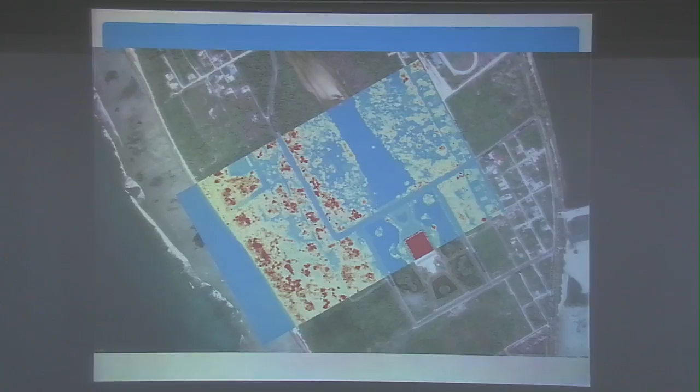So the Digital Earth, I don't know how many people are aware of this Digital Earth concept, was first introduced by the ex-Vice President of the United States, Al Gore, talking about how we need data that is multi-resolution, a three-dimensional representation of our planet. It is one of the collaboratories using this information as a basis for collaboration.

So ICT can help the monitoring of the dam site and the dam itself. We call this kind of system EDAM. EDAM collects digital data and digital information, and also provides easy access to the data set, analysis and models, and also keeps updating the information.

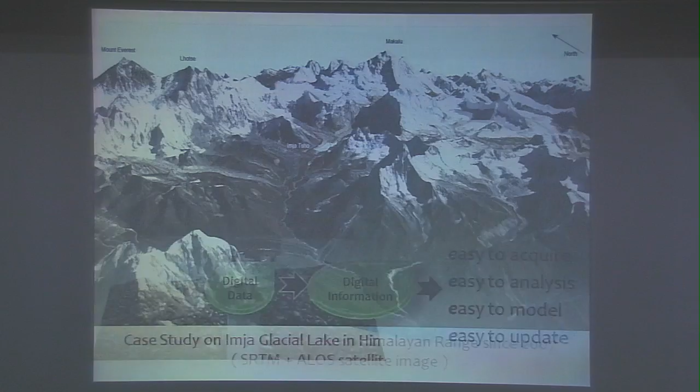Later we're talking about such a monitoring system for the natural dammed lake in the Himalayan site. As you know, global warming affects the Himalayan region, so glaciers are melting and making this kind of glacial lake at the footprint or endpoint area in the Himalayas. We would like to monitor the situation of these glacial lakes using ICT technologies.

In that case, it is a very remote, off-grid site. So we're setting up internet connectivity using a digital monitoring system, and also providing a wireless sensor network. After that, we would like to provide an early warning system for flooding issues, glacier lake outburst flooding.

So we introduced this field sensor system. Originally, this field sensor system was developed by agriculture ministries, as they have a need to monitor their field, crop fields especially.

So the field server is like this. You can see it on top of the desk. We'd like to show some demonstration after this slide description.

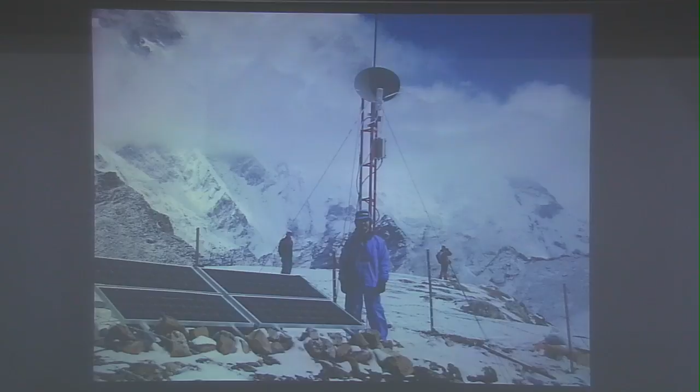So in the case of the Himalayas, we're setting up this kind of wireless connectivity. And this is the glacier lake itself. This is the end moraine, a natural dammed lake.

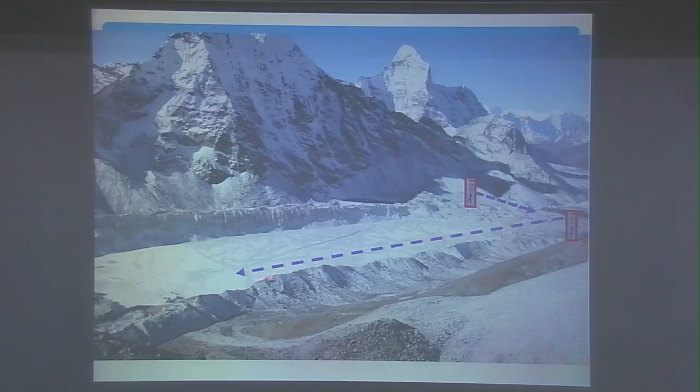In winter season, from November, it is almost frozen like this. We're setting up 2 field servers like this, to measure and capture by camera in the moraine district, and also the full range of the lake.

As you know, global warming has affected the situation of this dammed lake. If there is an avalanche in an upstream area, or a landslide happens, or a glacier is divided by a big block of ice, a big surge happens, and in that case the water level changes.

So using the field server, we connected water level sensors. If the water level changes, a message is sent to the downstream area to avoid flooding issues.

After that, they provide these kinds of pictures from this field server, and also continuously report the record of water level like this. So this is one of the mechanisms of field sensor systems.

So I want to show a demonstration of this field server. You can see the field camera here like this, and you can see these pictures.

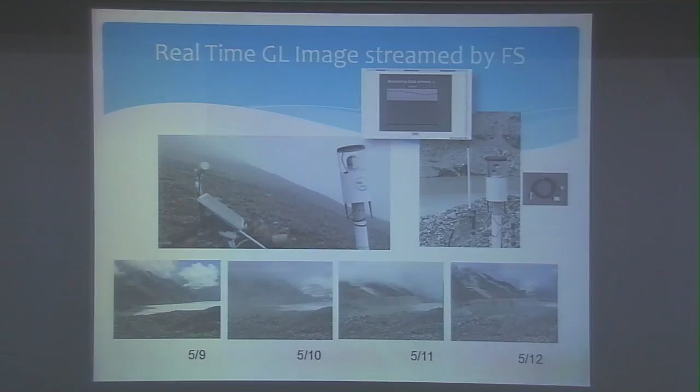So let's move on to the slide. The sensing technology is provided by these field servers. In that case, there is a wireless field sensor record, for temperatures, humidities, and other measurement devices. In the dam case, we are equipped with water level sensors, for example.

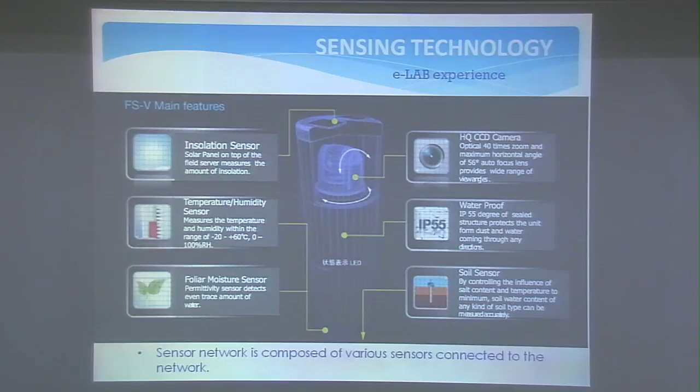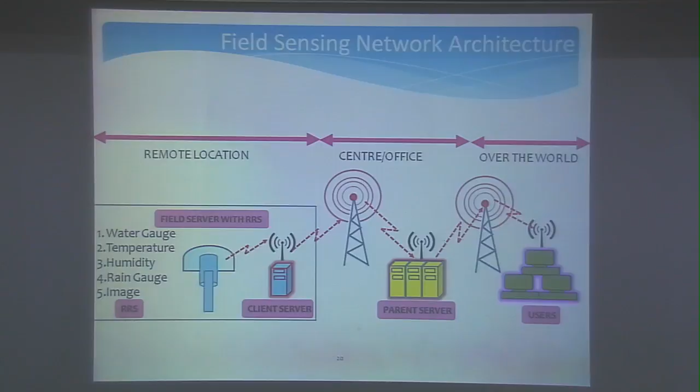If we set up this kind of network, we can open this data to the public worldwide. This kind of system is very simple, low cost, and low power, and also provides multi-mode network capabilities. By using this, we can provide real-time data sets and real-time simulation for emergency issues, and also connect to dynamic cloud services.

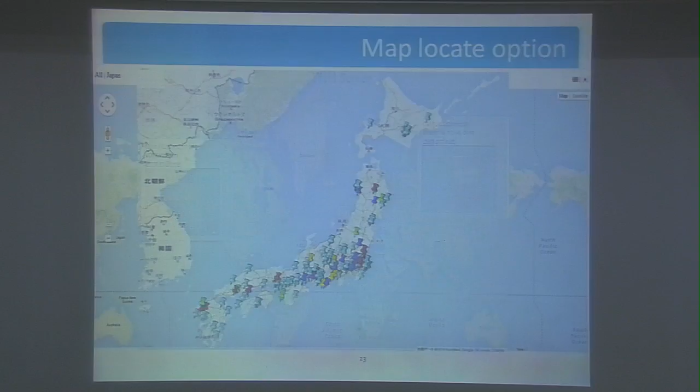This is the concept. Our central office is located, or will be located, in Chepauk, and you can monitor 120 dams by using the sensors once they are installed. Right now we are making a proof of concept by installing this kind of sensor in Poondi Reservoir, Pulal, and Chembarambakkam Lake.

The camera even has the option for event monitoring. Suppose something is going on at the dam, you can zoom in, zoom out, and also use face detection applications. You have an interface like Google Earth. Wherever you go, take your smartphone, log into the site, and click on that icon as a field server. You can get all eight parameters right now.

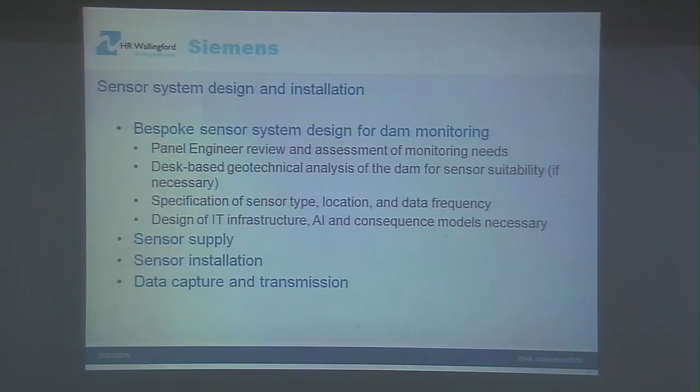As I've mentioned before, it's bespoke to the actual dam in question. One system isn't the same for every dam. Every dam has its own issues or items that you want to actually particularly monitor.

Some of the sensors that we used on the Urban Flood project included the geobeads. We found these to be really useful. They measured pore pressure, inclination and tilt, and temperature. They were probably about 30 centimeters long, and they could be designed in strands to whatever depths you required.

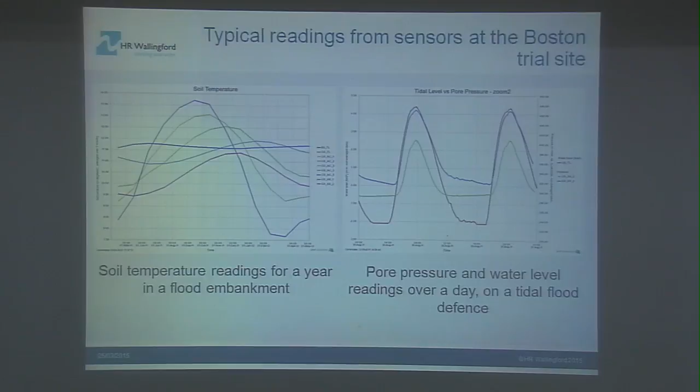What we can see is the pore pressures are reacting with the tide, as you would imagine. But what we don't see easily is that there's actually a time phase lag between the green and the blue line. This is something the artificial intelligence can pick up.

So with the data in the embankment, we can wirelessly transmit the data to the secure Siemens server, which is where the AI is doing the analysis. If there is an anomaly detection - so if you think back to the last slide with the tidal levels - if that time phase lag increased, you'd probably have a sign of potential failure.

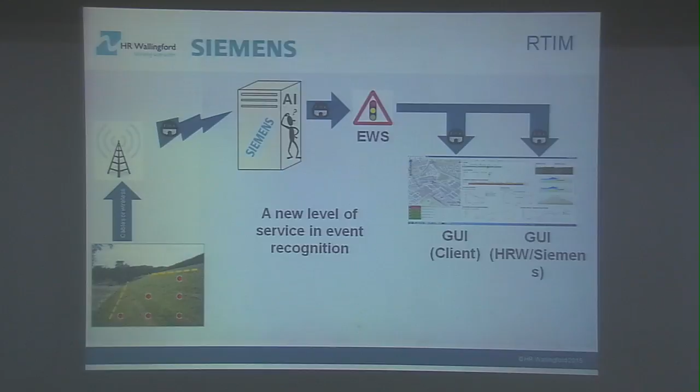This is where the artificial intelligence will set off the early warning system, and on your desktop, or your tablet, or your mobile phone, you'll have an alarm raised. That will initiate an anomaly investigation by HR Wallingford and Siemens.

What Siemens will be doing is looking to see why the AI has identified an anomaly, and it will talk to ourselves, and we'll look to see whether that anomaly is actually normal behavior. If it's normal behavior, then we can amend the AI to understand that this is normal behavior of the dam. Whereas if it's not normal behavior, then we can initiate the alarming system.

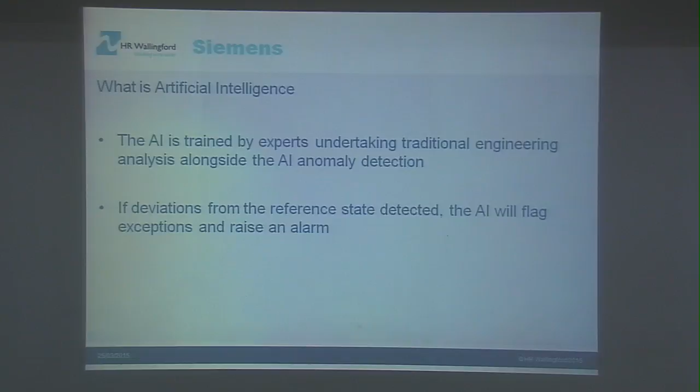So I keep talking about AI, I'm going to try and go into a bit more detail about that now. Artificial intelligence is trained by experts undertaking traditional engineering analysis alongside the AI anomaly detection. If deviations from the reference state are detected, the AI will flag exceptions and raise an alarm. The AI has the ability to look at relationships between sensors, not just the sensors themselves.

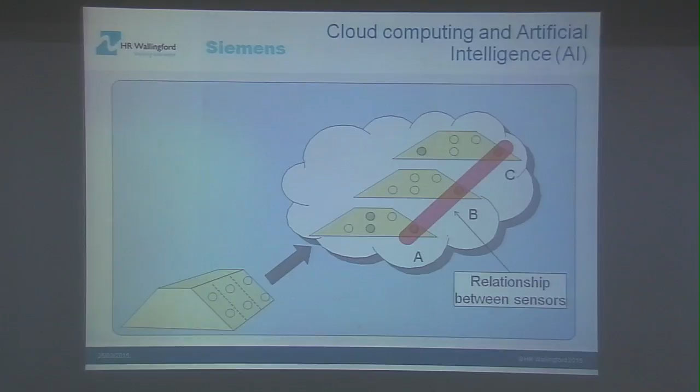For example, if you had a high water level and you've got higher drainage flow leakage, then you probably wouldn't be too concerned. Whereas if you had a low water level but high drainage flow leakage, then you would be concerned. The AI has the ability to recognize that as abnormal behavior and raise an alarm - not just a high-low level alarm, but alarms based on comparisons between data. It can look at the different types of sensors, and it can look at the dependency within all of the sensors within the cross-section of the dam.

So what are the benefits of having a system like this? We have enhanced surveillance. You may have dams in remote locations that you can't actually get to in severe weather. Having eyes on the ground when you can't get to that dam is a powerful tool. This improves safety, and also it improves and safeguards corporate reputation. If you can ensure that your dam is safe when you can't even see it, that will safeguard your reputation.

For the engineers themselves, it allows the data to be in one place. Data from different sensors and different manufacturers are all in one location, rather than having to go to various different sites. Not only that, you've got an extra pair of eyes looking at your data—it's actually analysing it in real time, every second as it's taking readings.

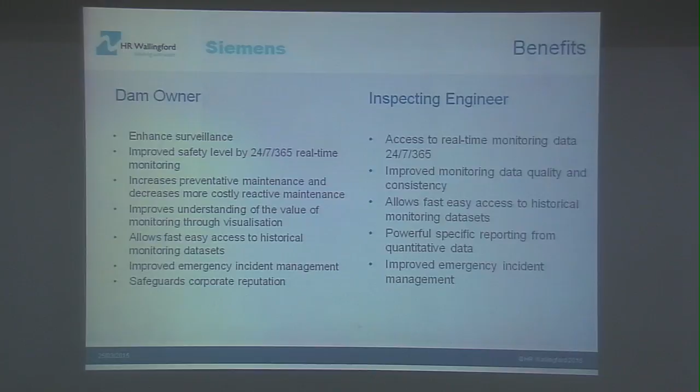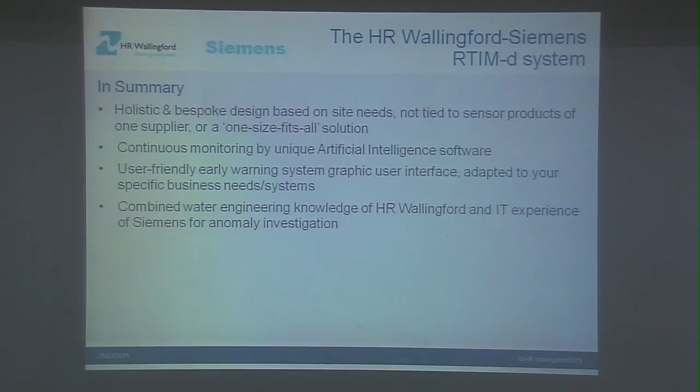So just in summary, it's holistic and bespoke design based on the site needs. It's continuous monitoring, it's user-friendly, and it uses the combined engineering knowledge of HR Wallingford and the IT experience of Siemens for anomaly investigation, with secure data handling and a standard level of anomaly investigations included. Thank you.

So now we have a case study on water quality and lime leaching in dams by Mr. N. Pandian, Executive Engineer, PWD Chennai.

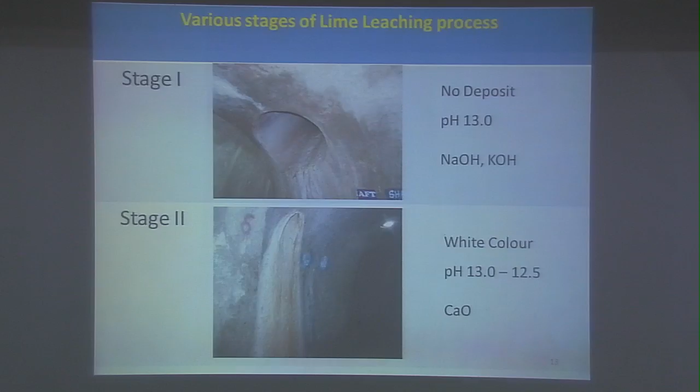Good morning to everybody. First of all, let me take this opportunity to thank the authorities of CWC, IIT Madras, and particularly PWD, for having given me a chance to present this paper in front of this highly organized forum. I am N. Pandian, and I've been working in this department, PWD, for the past 32 years in various capacities. At present, I'm working as Executive Engineer, SM&R Division.

The health status of dams can be monitored by so many methods: as you all know, by instrumentation, by geophysical methods, and the last one is the water quality and lime leaching method, which is being carried out by us in PWD.

Our Soil Mechanics Division, Research Division, has been allocated the work of monitoring the health status of important dams in Tamil Nadu by carrying out these water quality and lime leaching studies. Till 1984, these studies were confined to only the major three dams: Periyar, Vaigai, and Manimuthar. Gradually, this study has been extended to 14 other major dams of Tamil Nadu PWD.

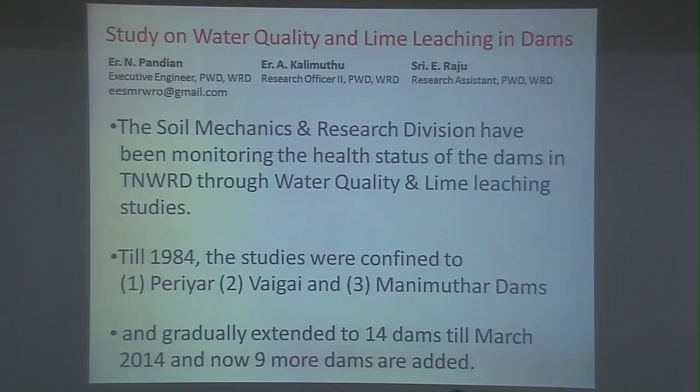The last category, reservoirs with soft water, mostly these dams are located in the hilly regions or at the foot of the hills: Periyar, Pechiparai, Perunchani, Manimuthar, Parambikulam, Sholayar, Lower Nirar. All these dams have low pH and low TDS.

These are classified under aggressive dams, which can be dealt with at a later stage, which will cause more lime leaching. Special cases are, then and there, referred to the SM division for carrying out research studies. One such case: recently field people reported that they were finding it a big problem to operate the shutters at Kodaganar Dam.

Higher authorities referred this problem to the SM division, and the then Executive Engineer deputed staff to Kodaganar Dam, who carried out a detailed study.

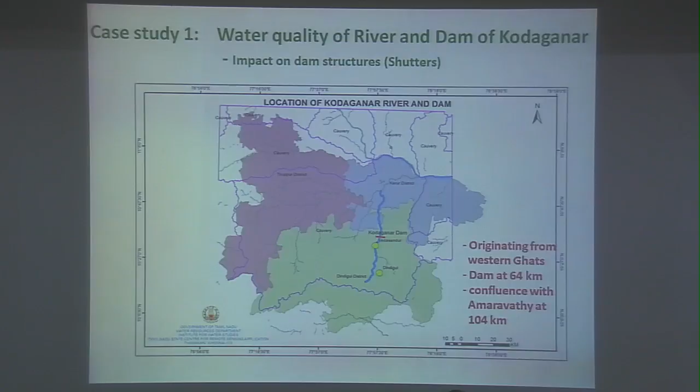Initial preliminary investigation reveals that the Kodaganar River is not having natural surface water. It is contaminated with highly industrial pollution. Our staff have collected water samples.

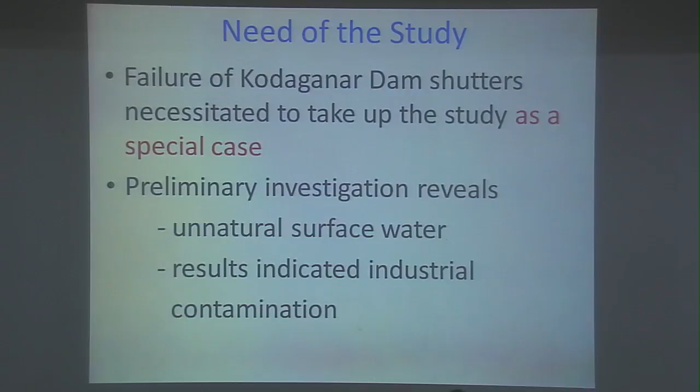It showed that pH values are ranging between 8 to 9, and the waters are polluted with heavy pollution, particularly industrial pollution let into this river Kodaganar.

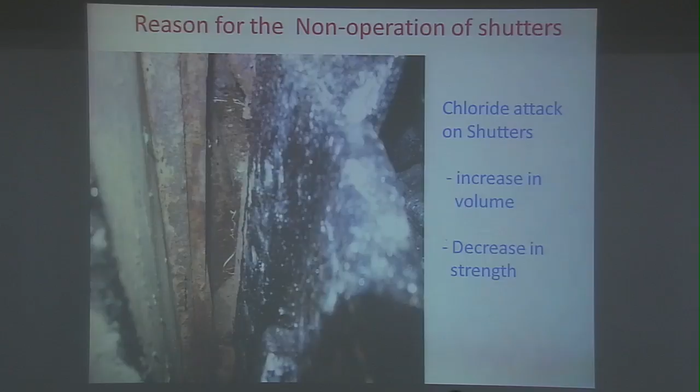Initial observation: deposits were found all over the shutters and structures. Scaling has formed throughout the structure. Shutters are completely corroded — you can see the photographs of the Kodaganar gates and shutters. The shutters have become almost immobile, due to the chloride attacks.

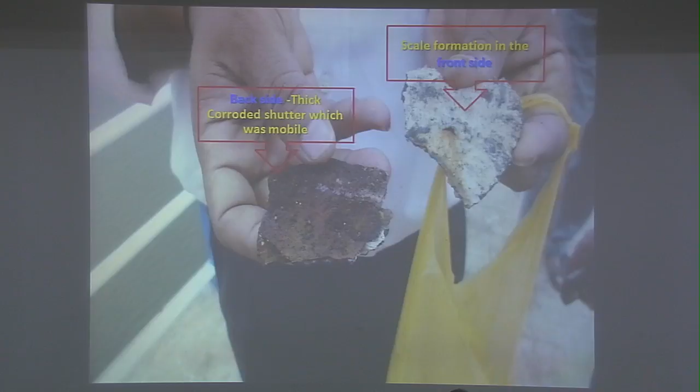Here the Kodaganar River, Kodaganar Dam, is having water with TDS more than 2,000. That is the problem caused by these shutters — the non-operation of the shutters.

When the test results of the Kodaganar Dam were plotted over the Baylis curve — the Baylis curve can be applied for waters with high pH and high TDS, while the Langelier index can be followed for low pH, low TDS, particularly where TDS is less than 1,000 parts per million. Here Kodaganar River has high pH and high TDS, so we followed the Baylis curve.

You can see that the tested value of Kodaganar Dam is falling above the safe band. This is the safe band — if the values fall within this band, then the water will be very, very safe. The values of Kodaganar Dam are falling above the safe band.

It means that the dam is having scale-forming water. That's the reason why the shutters have become thicker, and problems were found in the operation of the shutters.

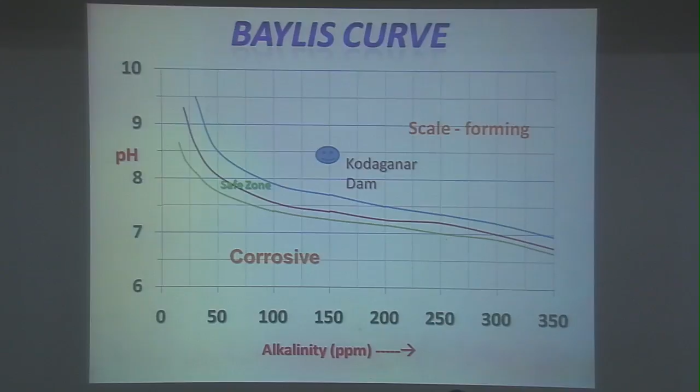The conclusion: the entry of polluted water shall be stopped. Shutters can be coated with special types of coatings. Existing surplus arrangements with shutters may be replaced with shutterless arrangements, that is, an uncontrolled spillway.

Let us go to the case study: lime leaching study from Manimuthar Dam. In the beginning, I said the reservoirs have been classified under 3 categories: reservoirs with hard waters, with moderately hard waters, and with soft water.

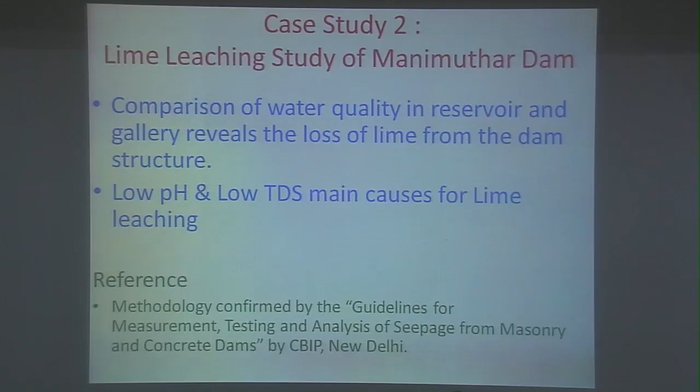In the case of lime leaching studies, the reservoirs can be classified under 2 categories: non-aggressive dams and aggressive dams, based on the LI index, that is Langelier Index, which can be calculated based on 5 parameters: pH, TDS, temperature, total hardness, and total alkalinity.

Among the 14 reservoirs, non-aggressive dams include Mettur, Krishnagiri, Sathanur, Mordana, Vaigai, and Lower Bhavani. These dams are coming under the non-aggressive category, being dams located in the plains, as opposed to dams located in the hilly region or at the foot of the hills.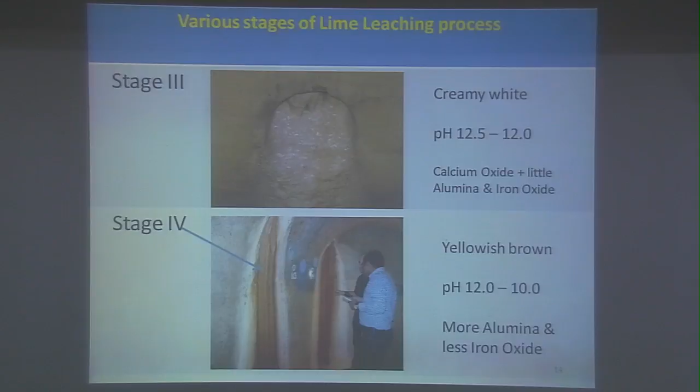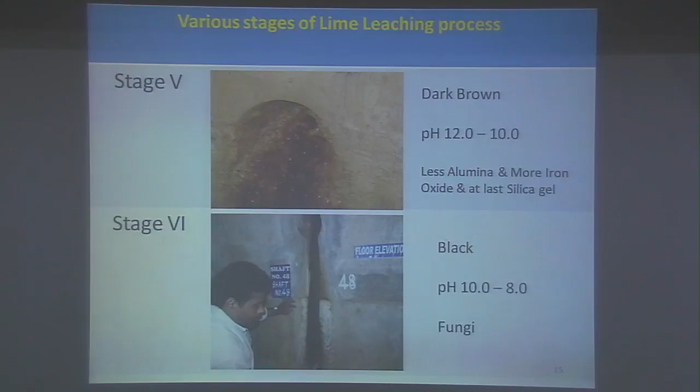Stage 6 is where the dam structure has no binding materials at all. Fungus has started growing in the voids created in the structure. That will be coming out. That is the last stage.

The cumulative lime loss has been calculated for the Manimuthar dam. The total loss is 4.88%. Of course, the allowable limit is 15 to 20%.

You can see the photograph on the left side. That has been taken inside the gallery, and it has confirmed our result.

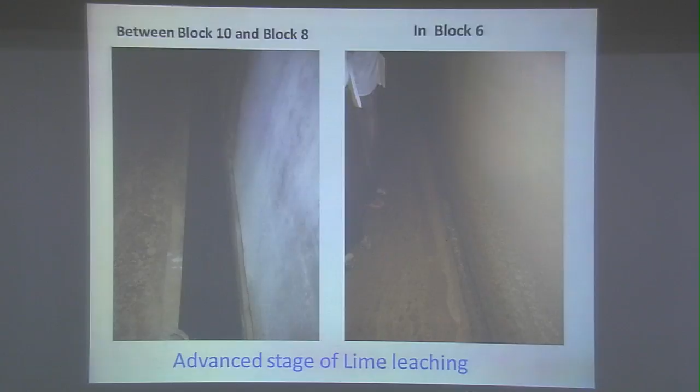Actually, you have to give more concentration towards the dams which have been located in the hilly regions. That is a case of concern. Thank you.

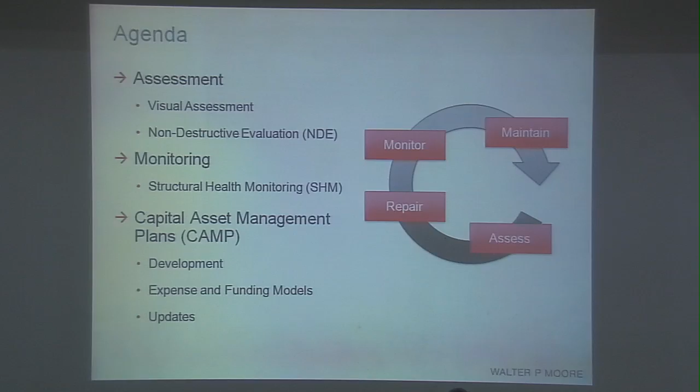So of course, we always have to start with a visual assessment to understand the current state of the dam, making sure that we're looking at it holistically - not just the main structure, but also the mechanical works, the appurtenances, the surrounding abutments - to understand the vulnerabilities, the deterioration mechanisms we're seeing, and whether we're seeing any signs of active deterioration.

Moving on from that, especially in reinforced concrete or reinforced masonry construction, once we start to see these deterioration mechanisms, we need to quantify them to understand the severity. Certainly, we're always looking at corrosion and spalling, leaching, things like that.

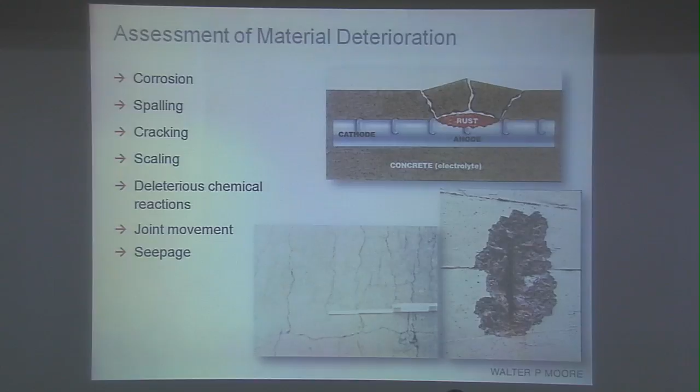We also often see deleterious chemical reactions in concrete, your ASR or DEF. Understanding the extent of that and how severe the issue is within your structure is very important. When we have jointed construction, understanding how those joints move over time is crucial to understanding the behavior of the structure.

We employ non-destructive evaluation on nearly all of our projects because there's only so far you can get with a visual review. You're really scratching the surface. There are many types of non-destructive evaluation techniques, and I've included some of the most common ones that we use, particularly in concrete and masonry dams, although there are plenty of others.

Thinking about one of the most versatile tools for understanding near-surface deterioration, it's GPR, sometimes called ground penetrating radar. This is a tool that's relatively affordable and easy to use, and allows you to characterize many things about either a reinforced concrete or masonry structure, helping you understand reinforcing patterns, delaminations, and voids, and understanding the depths and the extents of these distresses.

What we often find is that what you can see on the surface, what is visually apparent, is usually only a fraction, the tip of the iceberg of the distress that's latent within the structure. By doing these evaluation techniques, we can extend the knowledge and get a better sense of the scope and the potential cost for when we move to a tendering process.

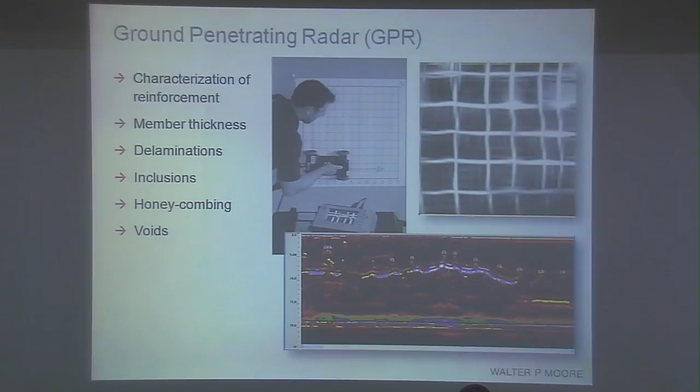I've included here also impulse response and acoustic tomography, two methods that are similar in nature, but work on different levels depending on whether you're looking at a mass concrete structure or whether you're looking at surface issues. But essentially the fundamentals are the same in that you're imparting a compressive impulse wave into the structure, and you're using an array of sensors to measure the arrival of that impulse at the receiving locations.

By doing this iteratively over a matrix of points, you can plot different parameters such as mobility and stiffness within the structure based on the different arrival times of the signal to different parts of the structure. By doing that, you can estimate cracking, and you can determine anomalies within the structure.

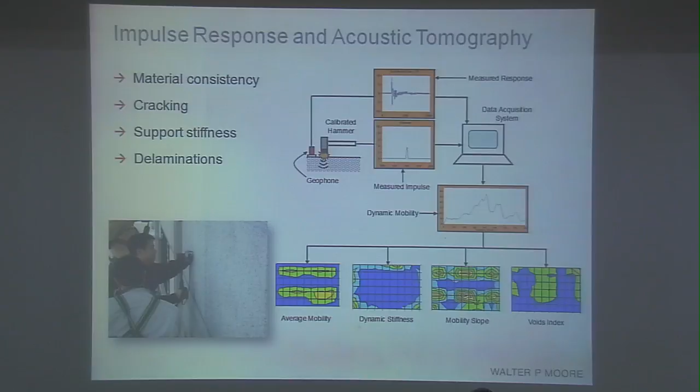If there are particular areas where the wave speed is much slower, it can be indicative of voids or cracking, things like that. This tool can allow you to look through quite a large thickness of concrete with the acoustic tomography, although you do generally need access to more than one side of the structure in order to accomplish that. So that can be an impediment to it, but impulse response can usually be done on one surface, though it will give you more of a surface profile.

Once we've completed the assessment, it's important that we understand the long-term health of an asset. With dams, many have instrumentation included in the initial construction, but those sensors go away over time. So one of the things that we always recommend is including a new instrumentation package. I've included some of the most common types of instruments that we use, although there are certainly many others, as some of the other presenters have discussed.

This long-term monitoring is relatively affordable, and it's easy these days to set up alarm situations where you can set parameters and get notifications about changes in state.

Certainly for many types of dams, inclinometers and tilt meters are some of the most common sensors. We can obviously mount them down borehole, which is the most common arrangement. In some concrete or masonry structures, if we're concerned about movement or rotation of certain elements, they can also be effective mounted on the surface, which is a much easier installation process after the fact.

As some of the other presenters have mentioned, we want to measure all of the known factors which may influence the data, such as temperature and water height, and maybe some other parameters depending on the structure, because you want to be empowered to understand how these cyclical changes in the measured data relate to known phenomenon. We know when we install these sensors that we will get seasonal or even daily variations with temperature, and if we don't measure temperature, it's hard to make that correlation.

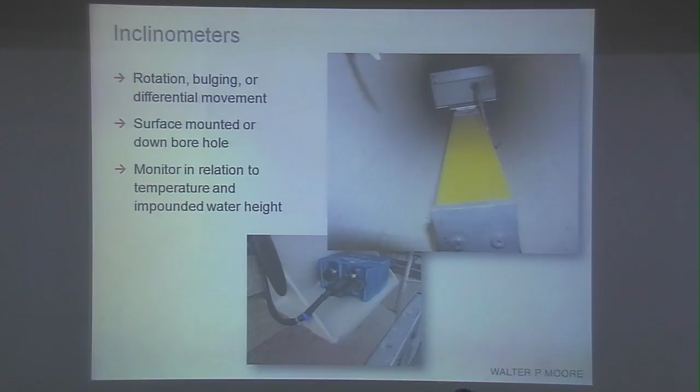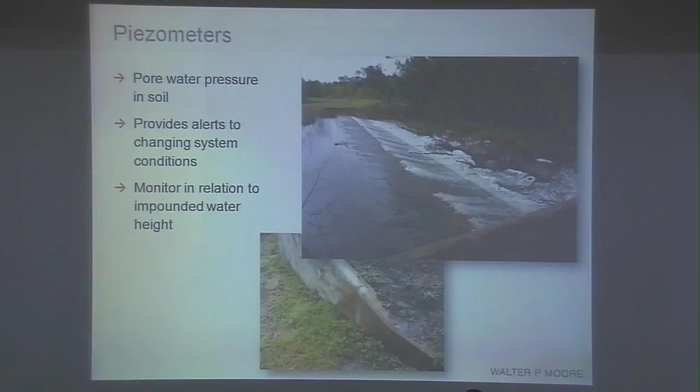Moving on, I want to talk a little bit about capital asset management plans, which are the tie that allows an owner to move to a proactive management technique. The goal of a capital asset management plan...

is to understand the existing deterioration and the mechanisms in play, to use engineering experience to predict when future interventions will be necessary and the type of durability enhancements needed periodically, such as repair of spalls, understanding expected quantities, and understanding the expense model every year for 5, 10, 15, 20 years to help the owning agency understand the cost of maintaining their asset in an optimal way.

That allows clients to work on a funding model to understand how they'll implement that. As part of this, we often do life cycle cost analysis to help people understand the benefits of selecting a more aggressive repair approach up front, which may lead to further savings down the road.

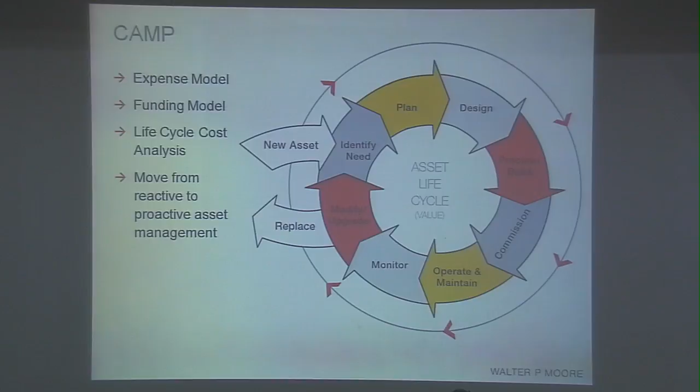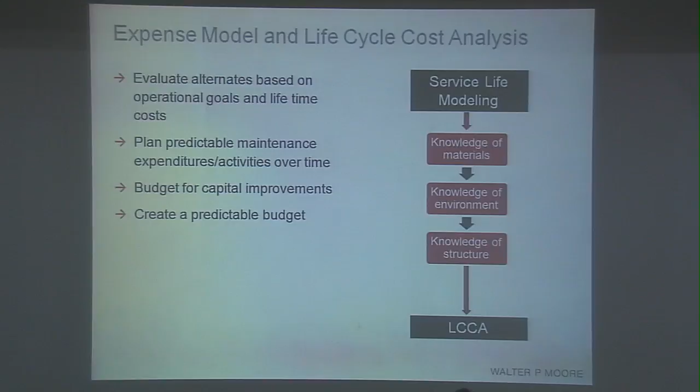Once we have the expense model, it empowers the operator or owner to budget towards those projected expenses. And then, of course, like anything, we need to maintain and update the plan over time.

These capital asset management plans are intended to look forward 10 to 20 years. As we do periodic assessments and receive feedback from monitoring systems, it's important to revisit those plans every 3 to 5 years to incorporate new data from further assessments or instrumentation, adjusting assumptions to project more accurately into the future.

With that, I thank you for your time. Thank you.

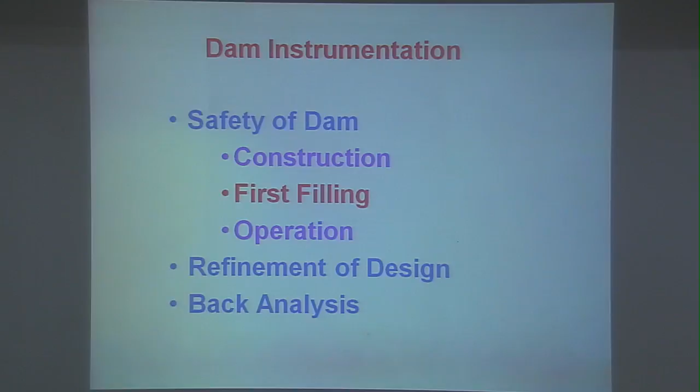Based on the instrumentation, we can do some refinement in our design. We did some refinement in construction also, as I'll be talking about. And the data can be utilized to do back analysis, as our input parameters to analysis and design are not properly done.

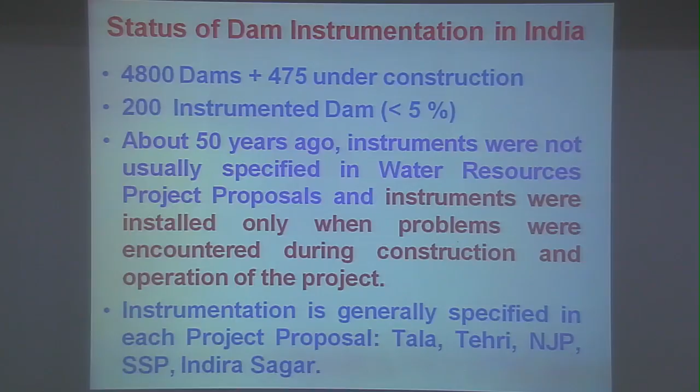I think I should not talk about the number of dams, but generally instrumentation was remembered in the old days whenever some problems occurred. Even now, even if we are not doing good instrumentation, we definitely remember it whenever problems arise. Most of our projects these days are very well instrumented.

This project is 3 kilometers downstream of Chukha Power House, constructed by the Government of India. This is the dam, and this is the diversion tunnel. This is the Wangchu River in Bhutan, where this project was constructed. Except for the dam, all components of the project were underground. It was 92 meters in height with a 130-meter length at the top.

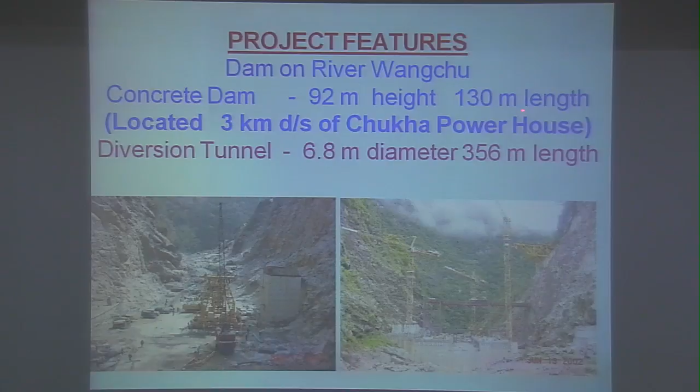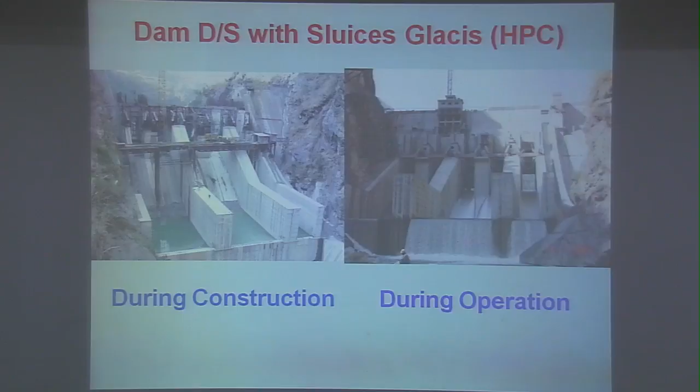This is the dam photograph after completion. This is the reservoir filling. This is the downstream of the dam during construction and during operation. This is the reservoir filling.

For doing an instrumentation program at Tala Hydroelectric Project, we planned this instrumentation program just before the start of construction. We prepared the technical specification for the instruments, and for the first time, I think, in our hydropower construction, we had contractual arrangements for calibration, supply, installation, and monitoring of the instruments.

To see the accuracy of the data, we should plot all the data, and it's better to go and check whether you are getting it accurately or not. Then you should do continuous analysis of the data. Unless you do that, you keep collecting data but won't be able to find faults with your instruments. It is always better to prepare a documentation report, which was done at this project site.

After completion of all instrumentation work, all instruments should be linked with the data acquisition system. The instrumentation is also dependent on the attitude and interest of the management. Sometimes they give more preference to construction activities than instrumentation, and we definitely remember it again at some point. There should be somebody responsible for instrumentation at the project site, like at Bhakra Dam, where they have a dam safety unit.

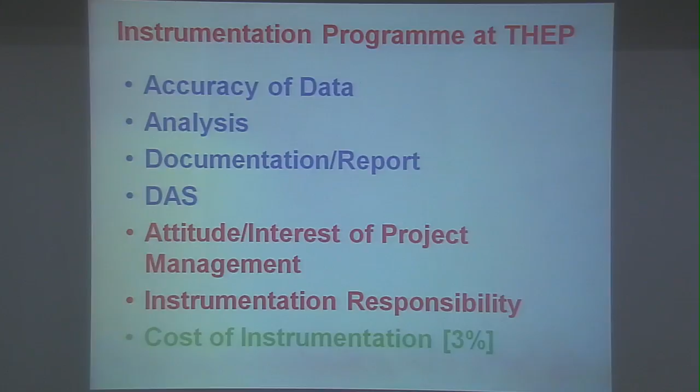We should have this dam safety unit. Now we are having a dam safety directorate in CWC, and in all the states. So it's better that we have the dam safety unit from the first day of each dam. As far as the cost of instrumentation, some people worried about it, but it's not much. Always in the estimate as per CWC guidelines it's 3%, but at this project site it was only 0.23%. So we should never worry about the cost of the instrumentation.

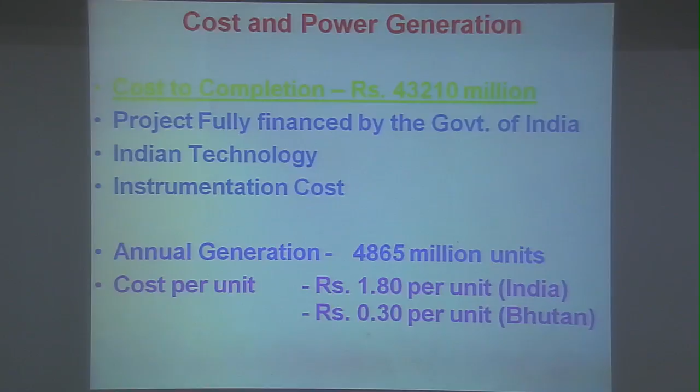This Tala Hydroelectric project was constructed with a cost of 4,321 crores, and the project was fully financed by the Government of India. It was constructed with Indian technology. We were not supposed to call any foreign experts. We had a contractor, Encardio-rite Electronics, and this contract was awarded just before the start of construction. They were giving us the monitoring results, and then I was preparing the report.

These are the instruments: temperature meters, pore pressure meters, joint meters, crack meters, multi-point borehole extensometer, normal plumb line, inverted plumb line, concrete pressure cell, vibrating wire strain meters, uplift pressure pipe, strong motion accelerograph, automatic water level recorder. These are the instruments.

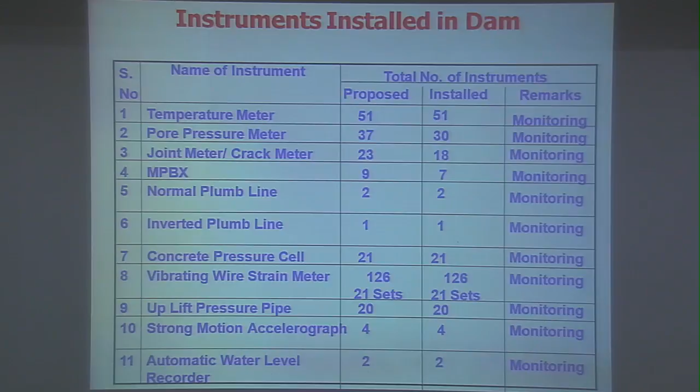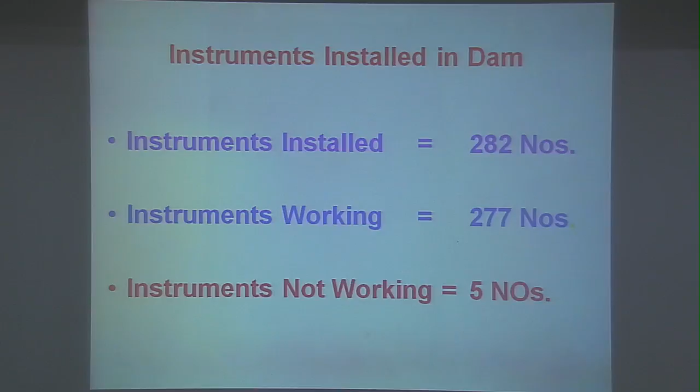Out of 282 instruments installed at this project site, 277 instruments were in working stage during the construction. This is the success of the instrumentation at this project site, and this was only possible because we had a separate contractor for this. At the time of installation, our engineer in charge, who is sitting here, Mr. Vinod Verma, and I, in charge of the instrumentation, and a person from the contractor side, we used to be there. If you install the instrument and cover all the instruments with the first layer of concrete, then you should not worry about it - we should take care of the instrumentation. Only 5 instruments were not in working order - one had some fault, and 4 instruments were not working because of water leakage problems.

The instrumentation was done in blocks 2 and 5 of this project. Block 2 was the non-spillway block, and we had a set of instruments - temperature meters at different stages, and stress meters or pressure meters - a thermistor is inside all vibrating wire instruments. So we should reduce the number of instruments by not installing temperature meters separately. That is my suggestion.

I joined this project in April 2002, and this data was already available. I got this data plotted, and I was surprised that our placement temperature of the concrete was only 10 degrees centigrade, but in our plotting I got it around 30-31 degrees. I asked the contractor why they were getting this data, and they said they started doing the monitoring after 28 days, which is not the correct procedure. So I told them in future to do it from day 1, so that when you are placing the concrete you are measuring the data manually, and then you can take the reading from the instrument also - this shows you the calibration of the instrument as well.

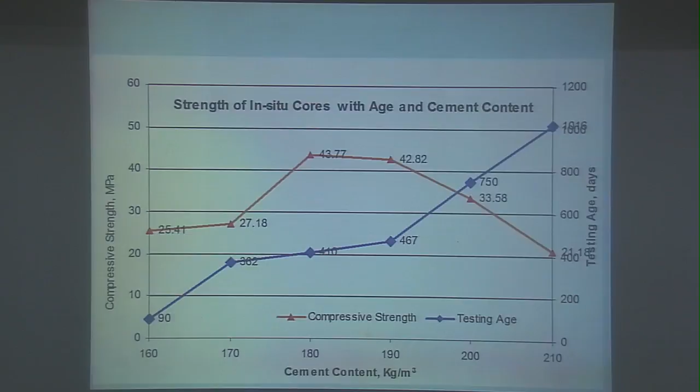Based on this data, we reduced the cement content from 475 to 425 kg per cubic meter in our headrace tunnel, because we were not having any compromise by reducing the cement content. When cement content was 180, we got the strength of concrete after 410 days as 43. After that, we were not getting any increase in strength — we were even getting a reduction in strength with increasing time. So this is the kind of data we can get from this.

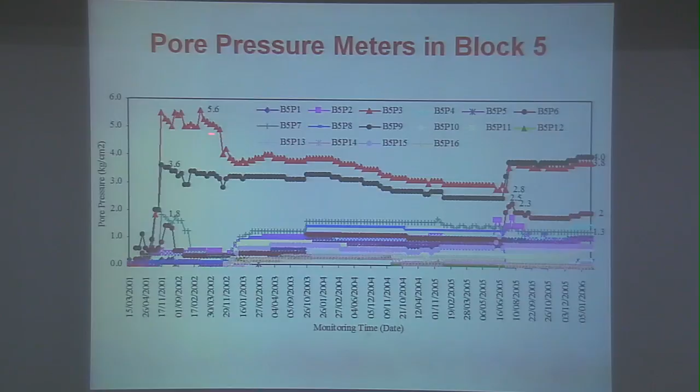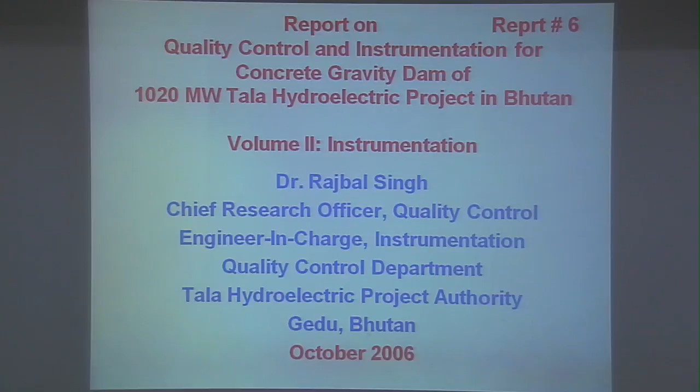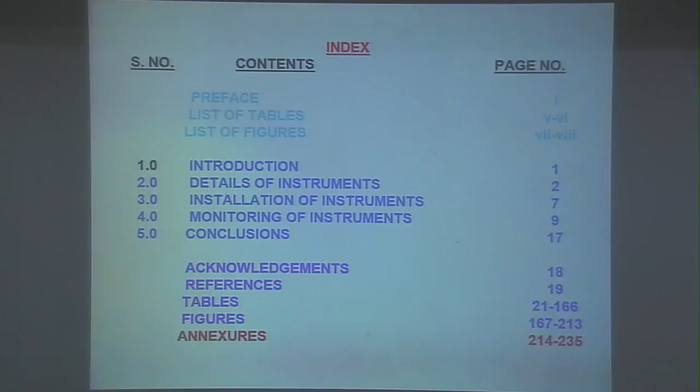I prepared 6 reports during my stay at the project site for about 5 years. These reports contained the details of the instruments, installation of instruments, monitoring of instruments, conclusions, all plotted in figures, and annexes containing all the routine data available at the project site.

My conclusion is that we could reduce the cement content in the mass concrete, and cement content in mass concrete should be optimized to achieve the required strength. High cement content leads to cracking in the mass concrete. Temperature readings should be monitored from the time of placement of the concrete so you can have calibration of the instruments also.

I had stresses of 5.5 to 4.4 kg per centimeter square based on the height of the concrete over this instrument. The only data I could get from an FEM analysis done by IIT Roorkee showed stress from static analysis was 9.2 kg per centimeter, and from dynamic analysis was 12.6, but our stresses were within these limits. The safe design parameters must be made available and attached with the data acquisition system as an alarm for further monitoring of the safety of the dam.

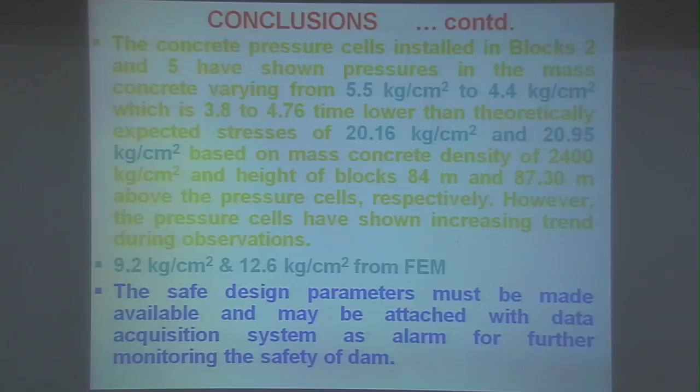This data was not available to us. So whenever we are issuing drawings for instrumentation, those drawings should have the safe capacity of the temperature, stress meter, or strain meter. So the designer should provide that data.

In general, the behavior of instruments installed at this project showed increasing and decreasing trends were observed. A record number of 277 instruments were in working order out of 282, and this was possible only due to the awarding of the contract for supply, installation, maintenance, and monitoring of the instruments before commencement of the project.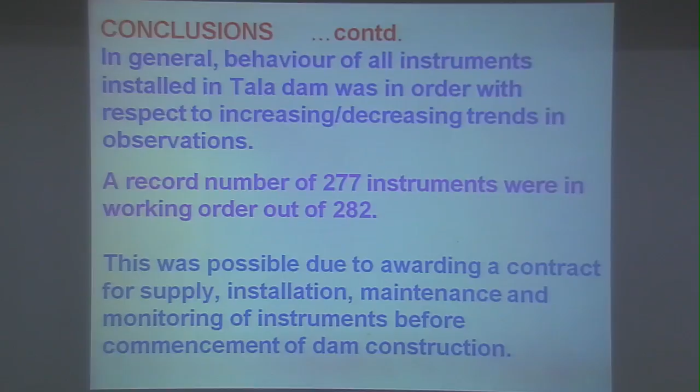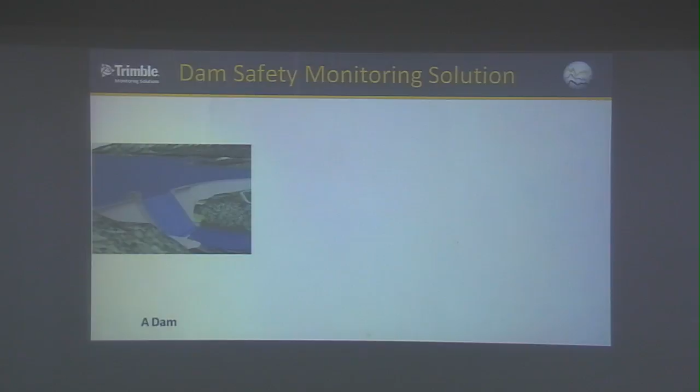Our system is designed so that we can take any form of geotechnical sensor input. All the sensors shown in the previous presentations, we can acquire data from those without any problems, including cameras from a system like this one in front of us—very nice system you've got there, by the way. We capture data from those sensors at various rates. These sensors are essentially automated, but we can also capture data by old pen and paper.

I'll cover that in the next slide or two. We capture the data and feed it into a software system. That software system has a centralized database, which addresses the problem raised earlier about data management and data storage. The historic data gets captured in this database and kept there for analysis and viewing.

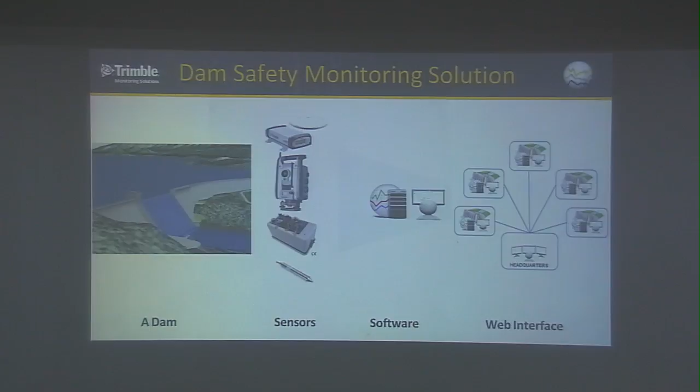If I was very brave, I would pull out a tablet and show you a live system running at the moment, but we all know what happens during demonstrations—the moment we bring out the tablet, the internet will go down. So I'll tell you it does work, and if you're interested in seeing a live demonstration, come to us afterwards and we'll show you the web address for a live installation on a dam.

I'm going to deal with the various components shown in that previous slide. First, our system can access all dam types—there's no limitation as to the type of dam we're looking at. The dam is simply a structure that we measure, so it doesn't matter whether it's an embankment dam, a mixture between the two, or a concrete dam. We have no problem measuring it.

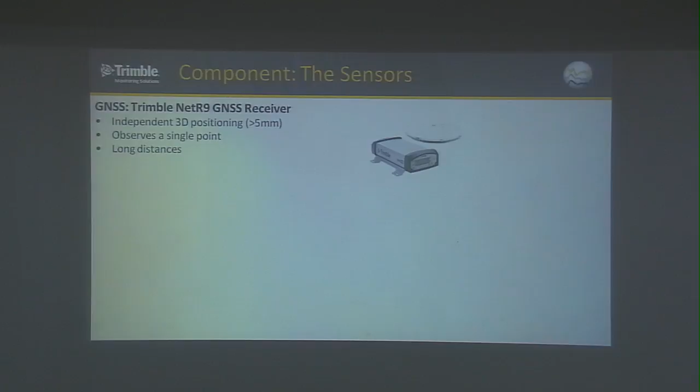I'll now run through the various types of sensors that Trimble provides. We provide GNSS receivers, including a specific receiver designed for use on dams—a smaller version of the one you see there. It's designed to be affordable, so that instead of spending the normal amount on one GNSS receiver, you can have more receivers, increasing the amount of data you get.

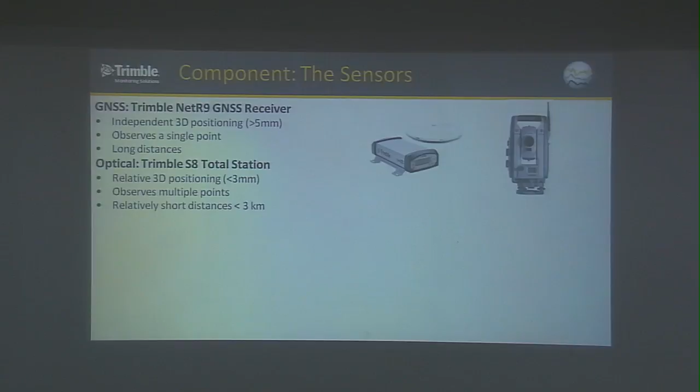We can also instruct the instrument to increase the number of observations being taken if we see some form of anomaly, either on the wall as a whole or in a specific area of the wall.

We then have seismic equipment. I've shown three forms of the equipment there. The bottom two are standard seismographs, seismic recorders.

The yellow device is something which has just been released quite recently. In fact, we had a release of this instrument 2 weeks ago here in India. It's a combined GNSS seismic instrument, which allows us to get positional accuracy, position determinations at a rate of 200 hertz with high accuracy. So we can actually get positional determination of the wall during any form of seismic activity.

Very fancy machine. It allows us to do harmonic analysis of the structure. I won't go into great detail in the slide. In fact, that's all I'm going to show about it. But if you're interested, it's a very unique instrument. Come and talk to us and we'll tell you a little bit more about it.

The final set of instruments that I've got here are geotechnical sensors. I literally ran out of space showing the type of sensors we can have here. So in the previous presentation, there was a very nice list of geotechnical sensors. We can read all of those, so all of that information can come into our system. So what we've designed is a system to capture data, and it's really source agnostic. We don't mind where the data comes from.

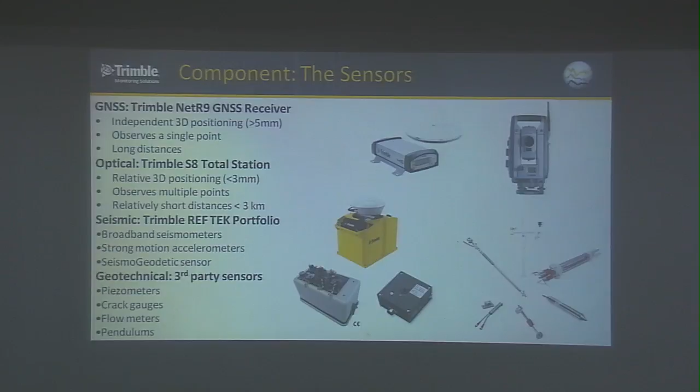Fine, what do we do with the data when it gets into the database? We have to observe this thing, we have to actually look at it. So we have three levels of software that we present to you.

We have a web-based, entry-level piece of software which is designed for the small dam operator who cannot afford to have a sophisticated monitoring system, but needs a place to store his data and visualize his data. This software package we call T4D Lite.

Our main package is called Trimble 4D Control. There is a desktop version of this, which is based on a server, or a cloud version. Now, the type of version that we're looking at for the DRIP project is definitely cloud-based. Based on the number of dams that we are looking at here, we're anticipating one owner having a number of dams that he wants to monitor, and monitoring 100 dams with this system is certainly not a problem.

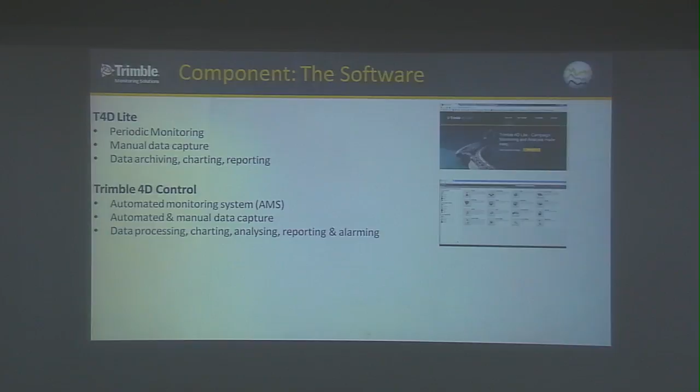That is the heart and soul of our system, and that's what I will cover in the next few slides. And then finally, we have really scientific software, which is the seismic analysis software. This is designed for post-event analysis of the data which comes from our seismic sensors that we have on all of the dams. Now, the whole of India is classified as a seismically active area. So in all the dams that we are looking at here, we have some form of seismic sensor included in it. So those are the primary three software packages that we have on offer.

And the one that I'll cover now in detail is the one in the middle, the Trimble 4D Control software. Now, the software itself comprises two parts. It comprises a very powerful backend, which is a powerful engine that does a lot of number crunching and a lot of analysis. That part, I just want you to know, exists.

You don't have to worry about it. It sits in the cloud and it does its thing. The thing which is important to you is actually the usability of the data. And that is the front end, the interface that we present with it.

And what we do here is we present a web interface which is designed for two things. It's designed for easy access and easy use of the data for normal day-to-day operations. And then it's designed to have a second component to it, which is the complex analysis of the data in the event that some form of activity is detected.

Right, so here's a screenshot of the web interface. Each of those buttons takes you off to a particular zone of interest, and I'll touch on a number of them to explain to you what this software does. If I can get to the next slide.

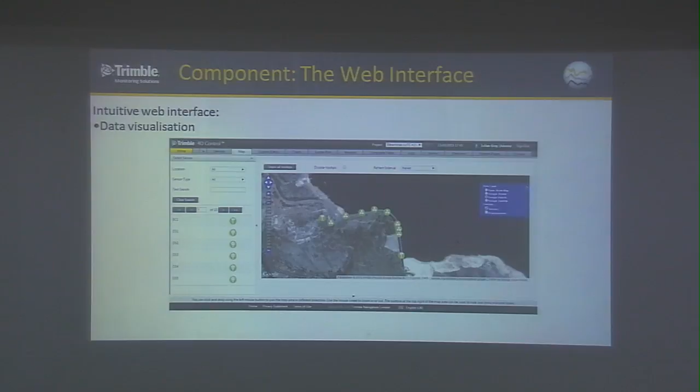The color code of the sensors indicates the status of those sensors, whether they're in an alarm condition or whether data is flowing or not. If you tap on the sensor, you can get information relating to it.

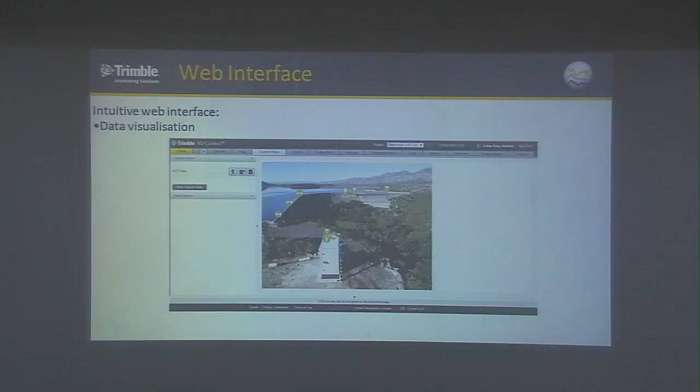We can also show the sensors with an image background. So if we have a cross-section of the dam, we can show the sensors in relation to that cross-section. We have a simple form of charting which is totally interactive, and these charts get updated the moment the data comes and is available.

We have complex analysis functionality on this software which uses Boolean comparators, where we can compare data from different data sources. We allow the creation of composite views of data so that you can look at multiple data sources in one screenshot. We have very complex alarming facilities on this.

We have alarming functionality which allows for standard alarming, alarm escalations, the issuing of SMSs, emails, the firing off of batch files, activation of audible and visible alarms, etc.

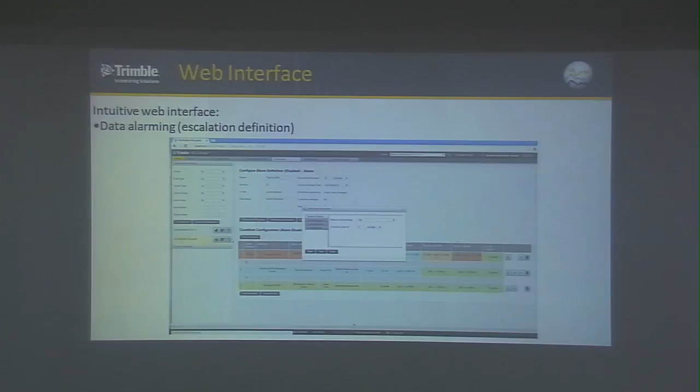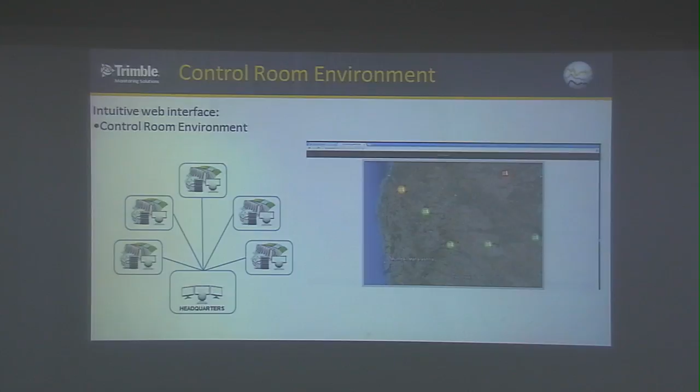Finally, the one overall screenshot we have is a control room environment screenshot where we summarize the status of each dam in one screenshot. So you can have a screen showing the dams in a particular area, and each icon on that screen represents a particular dam and its overall state. If you click on that icon, you go directly to the web interface relating to that particular dam.

We have a proposal on the drip solution here where we will offer to evaluate your dam. We will come and design a solution for you. We will provide manual collection facilities, and we will actually run it for you if you so wish.